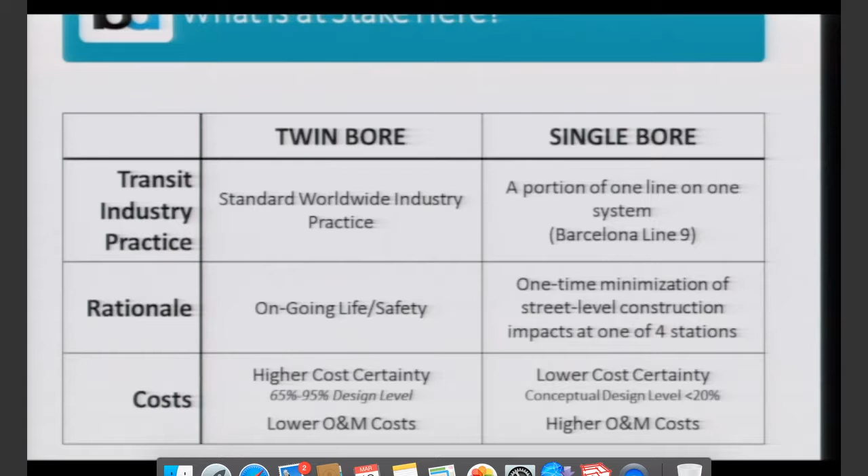We know that the ongoing operating and maintenance costs are higher for single bore. I think where I would leave it is that, particularly in light of the life safety concerns we have, cost shouldn't be, and I don't think is, a driver in terms of the ultimate decision made here. And with that, I'll turn it over to Bob Mitroff.

Good morning, directors. I'm going to walk you through the base option for the single bore design and a number of features of that option, including the tunnel diameter, the track alignment, the number of transitions, the platform configuration, the platform widths, and the station construction method. I'll focus on those 6 different attributes for each alternative as I walk through the base, the modified base, and all the other alternatives considered.

The single bore base alternative has some key features. One is you've got 4 transitions between side-by-side tracks and stacked tracks. And then you've got 2 long sections — one near the Alum Rock station, and one between the Downtown and Diridon stations — where you are in a stacked track alignment. You're dealing with a 45-foot wide single bore tunnel as well.

As far as the station design is concerned, again focusing on the safety attributes of the differences between the twin bore station and the single bore station — the first thing you notice in this drawing is that the twin bore station is much shallower.

The depth of the platform there is 55 feet. The depth of the single bore station platform is 85 feet below the surface—imagine you're at the Embarcadero station at the BART level and you go one level down from there. Having such a deep platform is going to have a significant impact on your ability to get people to the street as a point of safety within the 6 minutes that is the governing code amount.

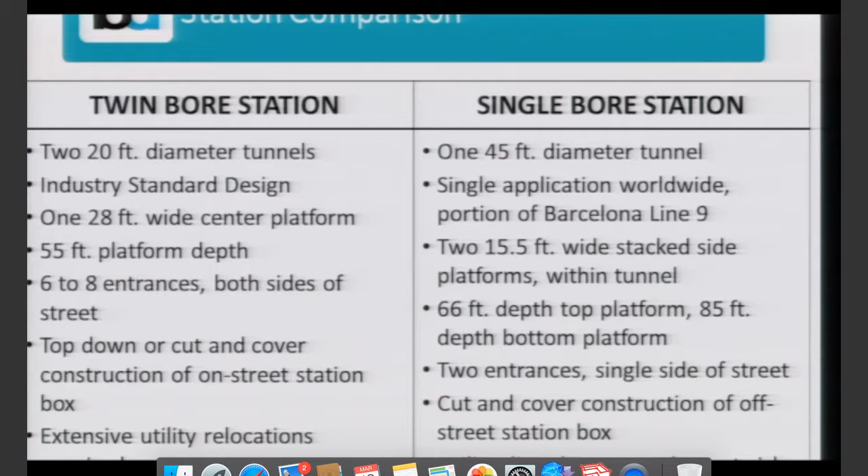This slide is just a summary of the attributes of each station. I pretty much went over all of these: the depth of the platform, the number of entrances. The narrowness of the stacked platforms in the single bore design is also an issue. We prefer a center platform because it allows you to use the off-peak half of the platform to handle the peak period crowd, whereas with stacked platforms like you have here, you're only limited to the 15 feet you have to handle the peak crowd.

So that poses an issue during evacuation, because people have to have at least 5 square feet of space around them to be able to move out of the platform area and into the concourse.

This is a cross-section of a conventional twin-bore tunnel design for BART. You'll note that you've got 2 tunnels about 20 feet wide, and then you've got a cross passage, and you'll have 33 of these within the 4-mile subway, which has a number of desirable features. It is level with the train, and it has doors on either side to prevent smoke, serving as a buffer from the smoke of the incident train to the rescue train.

Okay. Anything else on that, Tom?

The advantage of this configuration when you have an emergency incident is that the patrons from the incident train can pass through the passageway, allowing you to corral them there so they don't end up in the trackway for the rescue train. Without this configuration, whether stacked requiring people to go up or down, or two tracks connected without a passageway, patrons go from the incident track to the rescue track, creating a much higher risk of patrons ending up on the trackway as crowding around the doorway increases. So the advantage here is crowd control for an emergency evacuation.

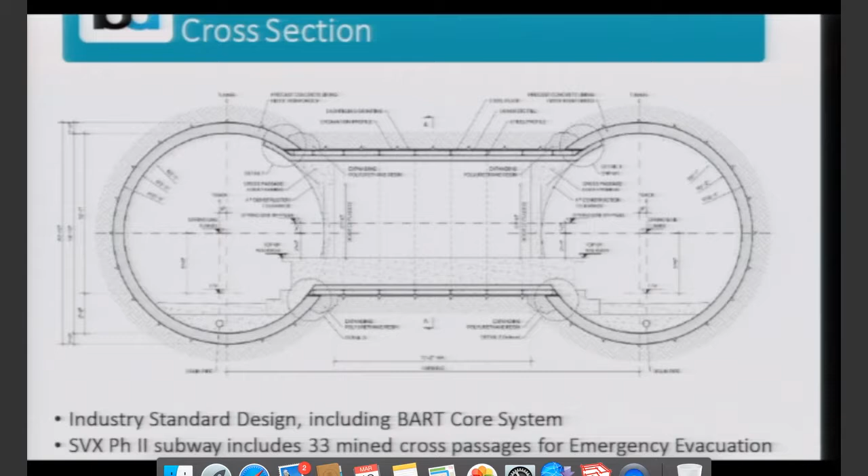BFS, what does it mean? BART Facility Standards.

Thank you. This is a very important slide, one of the things the peer review panel focused on more than anything during our presentation. It shows the transition within the single-bore tunnel between side-by-side trackway and stacked trackway. On the left, the trains within the tunnel are side-by-side, separated by a doorway. Compared to the mined cross passages design we saw before, this has less of a buffer zone between the incident train and the rescue train, which concerns us. But what concerns us most is that as the tracks go from side-by-side to stacked, you lose the stairway between the tracks for nearly 1,000 feet, from the 3rd tunnel cross-section to the 2nd on the right.

That's 3.25 football fields where people, depending on where the incident is on the train, have to use the 30-inch walkway to get to the stairway that ultimately leads them to the rescue train and to the point of safety. Let's stop for a minute.

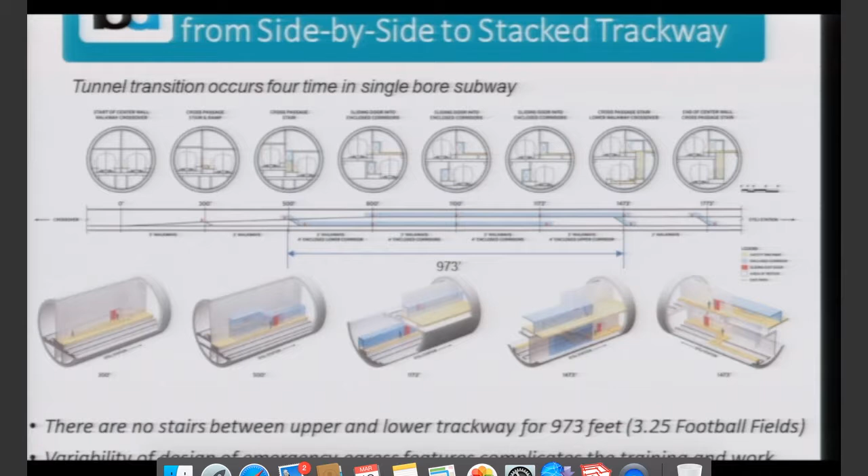That makes getting proper ventilation in the large sections extremely difficult. Just to tie it back to what Paul was saying before, the fire in DC—I don't know about the one at BART—but the diagnosis from the DC fire was the fans. One problem was the ventilation system was there, but they put the fans in the wrong direction. So the more complex the tunnel configuration, and the fact that it's changing, raises the concern that the direction of the fans and the operation of clearing out wherever people are becomes far more complex than anyone would want to have on their hands.

These issues were presented to the peer review committee that met in mid-November of last year. The peer review panel members were composed of senior executives in operations and construction from LA Metro, SFMTA, New York City Transit, WMATA, New York MTA, and MARTA.

One of the main issues they focused on is what are the risks and challenges associated with the single bore option, and can it be operated and maintained as safely as an extension of the BART system?

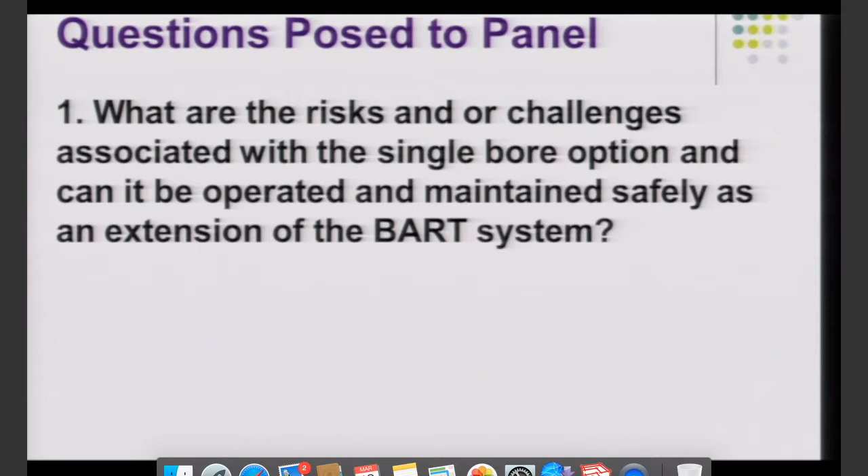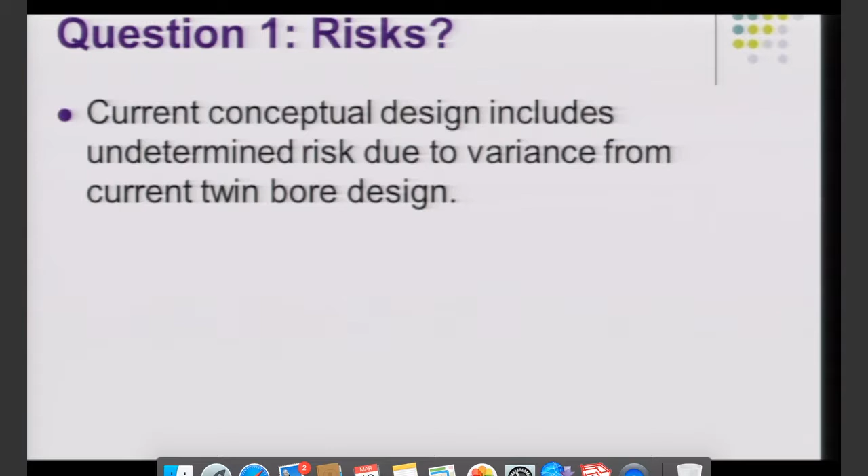They determined that the base design presented an undetermined risk due to its variance from the current BART twin bore design. Specifically, they focused on the transition areas as presenting the most risk during train evacuations, and they highlighted a number of things, including that you have to rely on stairs for evacuation in the stacked alignment.

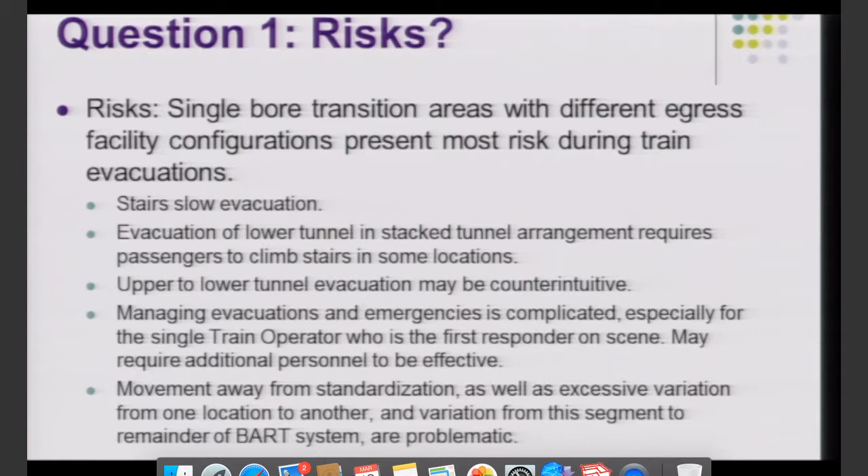Sometimes you're actually going from an upper level to a lower level during an emergency evacuation, which is a counterintuitive move. You're putting a huge amount of pressure on the single first responder, which is the train operator. And you're moving away from standardization, which raises the ventilation issues Barney was speaking about, given how different it is from the rest of the BART system.

Training can help, but as Paul mentioned before, in a moment of emergency, in the fog of war, the equipment and infrastructure has to be as intuitive and consistent with the rest of the BART system as possible.

There are other issues, less related to safety, but maintaining all of those escalators in service with those very deep stations is going to be an expense as well as a challenge, as we all know.

Single bore has been used in roadways, but never in a heavy rail transit design in the United States. And while VTA would be the owner of the facilities, in the event of an emergency, BART would be the de facto owner.

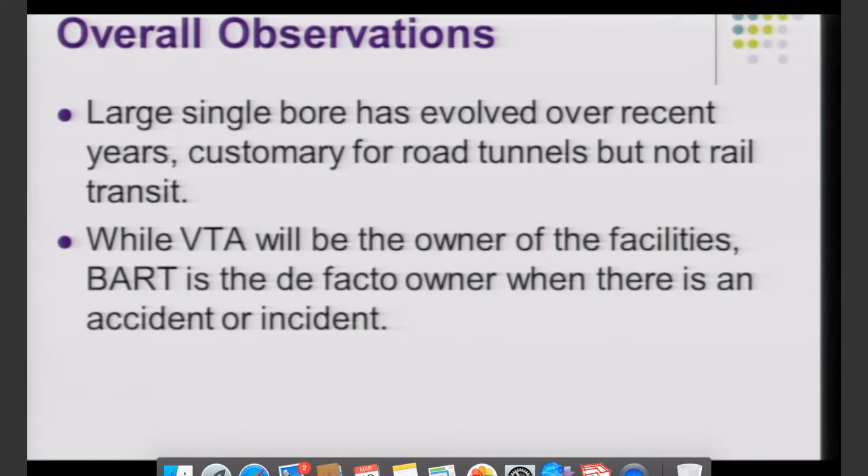They recommend that the project go forward with a unified front, and that the safety and operational issues BART has raised be recognized and reconciled by both parties. If they had to choose one alternative, they recommended twin bore as the alternative going forward at that time. Single bore could be operated in a manner consistent with BART's safety objectives, but there would have to be a lot of work done on consistency, training, and fire life safety. But even with all that, the risks outweigh the benefits with this method of construction.

They did instruct the panel to work on design options for single bore that could meet BART's design safety concerns, and we'll discuss those now.

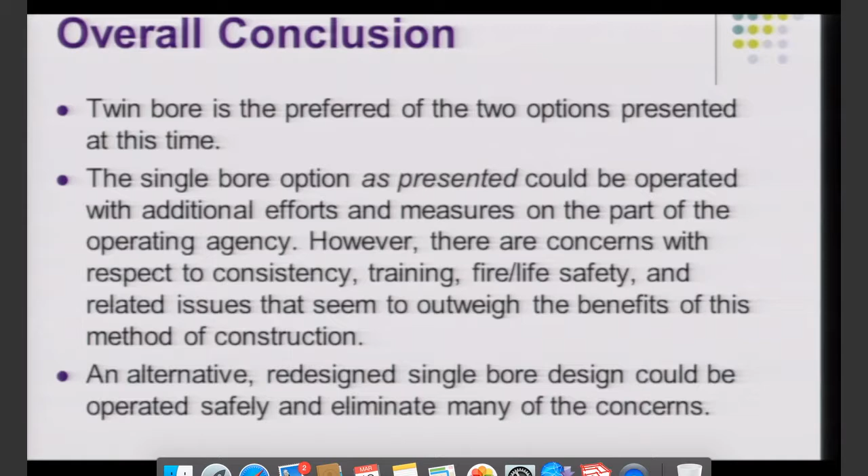In order to have a productive discussion between the two agencies on design options for single bore, VTA asked BART what our main objectives are in the design of such systems. Those are laid out here.

We want side-by-side, not stacked trackways, in the tunnels and at all stations. We prefer center platforms with sufficient width to handle future ridership. Another issue with the side stacked platforms at their downtown station is they're 15 feet wide, built inside a tunnel, and that's it for 100 years.

The ventilation system should be consistent with our existing ventilation systems, especially during emergency. The design for fire growth should be consistent with NFPA (National Fire Protection Association) 130 provisions, the California Building Code, and our own facility standards, which call for an instantaneous fire growth scenario, which you have to look at in the event of an arson fire

or a train on fire coming into a station. BART is willing to consider an engineered point of safety underground, provided that it meets all the provisions of these same three codes: the NFPA, the CBC, and the BART facility standards. We are very concerned that people who have mobility issues can be safely evacuated from an incident train to a point of safety. Therefore, we wanted both sides to develop an emergency response plan with input from first responders, fire departments, our system safety department, as well as the ADA community in the larger BART district, as well as Santa Clara County.

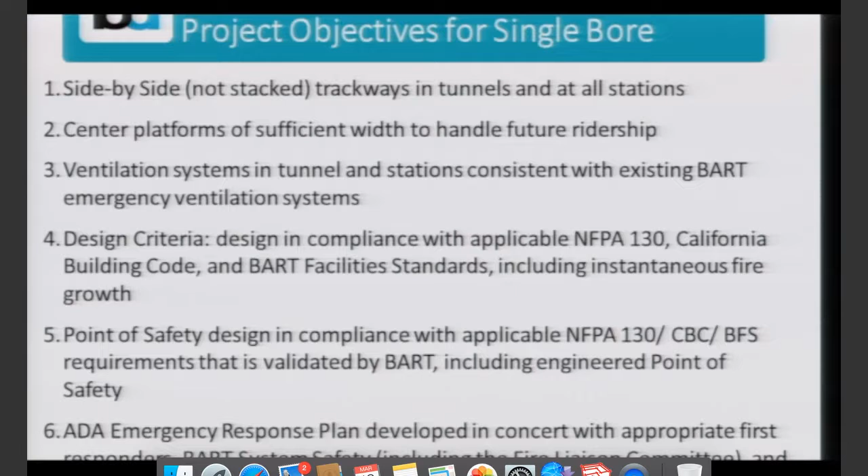Just to frame the issues we're dealing with in terms of passenger volumes at the stations we're most concerned about—again, we're most concerned about the downtown San Jose station. That is projected, in 10 years after its opening date, approximately year 2035, to have 24,000 daily entries and exits, which puts it in line with some of our medium-sized subway stations, such as downtown Oakland, downtown Berkeley, 16th and 24th in Mission. The other stations they would be building within the subway are more in the range of Ashby and North Berkeley ridership levels. Again, all the stations I've mentioned here have center platforms within the subway.

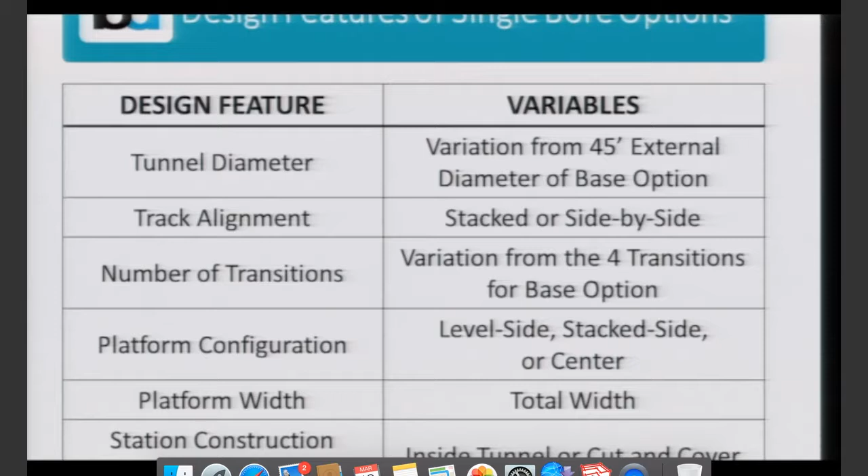So the key features we were looking at, as I raised earlier, when we talk through the design options, these are the things that are going to be varying: the tunnel diameter and its variation from the 45-foot external diameter of the VTA single-bore base option; the track alignment, whether it's side-by-side or stacked; the number of transitions, with 4 being the number in the base option; the platform configuration, whether you have level-side platforms, stack-side platforms, or center platforms; the absolute width of the platform; and the station construction method, whether it's inside-the-tunnel construction, as the VTA single-bore base option is, or cut-and-cover construction.

So the first option VTA presented to us is basically a minor variation on the base alternative, where they would construct—you see them in the red squares on the diagram—emergency exit stairs from the tunnel in the transition sections. This would allow you to reduce the evacuation distance in the tunnel from 1,000 feet, 3 football fields, to 500 feet, 1.5 football fields. Mind you, you're still 80 feet underground. You have to walk up 8.5 flights of stairs to get to the street. So this is an improvement, but it's not the game changer we needed to be able to recommend this option to you.

It has one additional feature, addressing the fact that a station with only 2 entrances is likely to have a conflict in emergency exiting traffic between first responders and patrons. So they're proposing to install a separate first-responder-only stairway within the station to get first responders from the concourse to the platform. But again, that's 8 flights of stairs to get to the bottom of the platform. So this is the option VTA is recommending at this time. BART staff cannot recommend this option to you. There are other options we will go through that we think have merit.

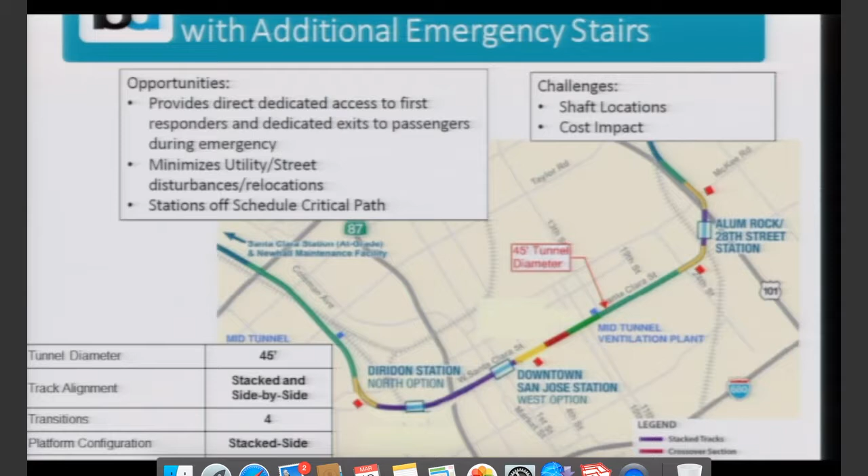Yes. It does not address the fundamental issue of the complexity for ventilation and evacuation within the transition areas, especially the ventilation issue.

Okay, that's helpful, I'll ask more questions. And I'm sure a number of folks on the board are going to have questions, so if you can give us a little bit of an idea—the duration of this presentation, and the kind of questions we're going to need to field today versus what action we need to take, in terms of the timeline, because you all have been committed as staff to coming to this board at least once a month, twice a month, with these updates. So I just want to give us some frame. Yeah, I think Bob's got, I don't know, maybe 10 or 12 more slides here.

And then we go into a little bit on Plan B. Grace, the general manager, has repeatedly said to this board and to me, Plan B is the twin bore. So there's the construction staging that we could walk the board through on twin bore that's up here. And Director Simon, to your question, one of Bob's slides coming up is the schedule on when the BART board is going to need to take an action and what that action may or may not be.

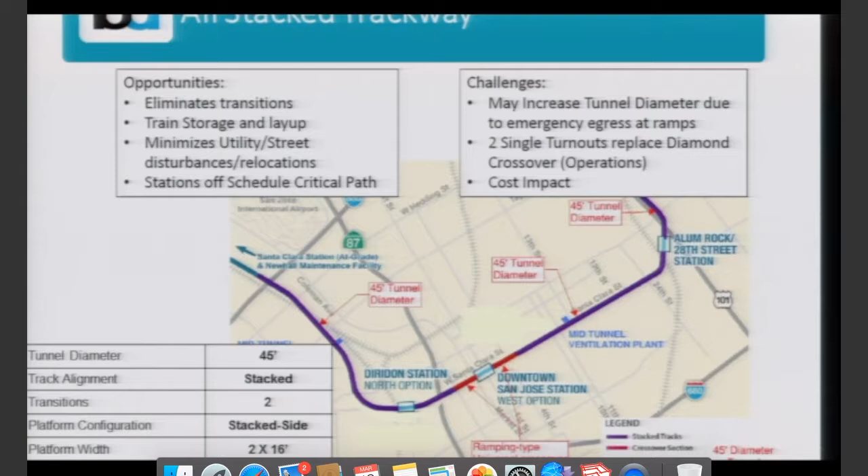So in an effort to reduce the number of transitions, VTA came up with a couple of alternatives. One is that you run an all-stacked alignment from Alum Rock all the way through to when you come out of the portal near Santa Clara. So you still have two transitions, you still have a 45-foot wide tunnel. They recognize that we have evacuation issues with an all-stacked alignment, so they are not recommending this alternative, and we agreed with that decision.

The next alternative is you move the transitions right around the downtown station. So instead of transitioning by Alum Rock and Santa Clara, you're transitioning just as you enter and exit the downtown station area. This is a more significant improvement in the design because you're going from 4 transition areas to 2. You're still dealing with stacked alignment in and around the downtown station, and you're still dealing with the narrow side platforms at that station.

I have to mention one major attribute: in order to maintain side-by-side trackway at the Diridon and Alum Rock stations, you're going to have to do cut-and-cover construction at those stations. And as we've mentioned before, Alum Rock is an industrial area for the station site, and the Diridon station is a parking lot, so you're not dealing with the business impacts of constructing cut-and-cover at those locations.

Just a point of clarification. On this slide, I read this as there's only one stacked station downtown. Correct. I'm confused with the mention of Alum Rock. Alum Rock would be a level side platform configuration, similar to some of our cut-and-cover stations.

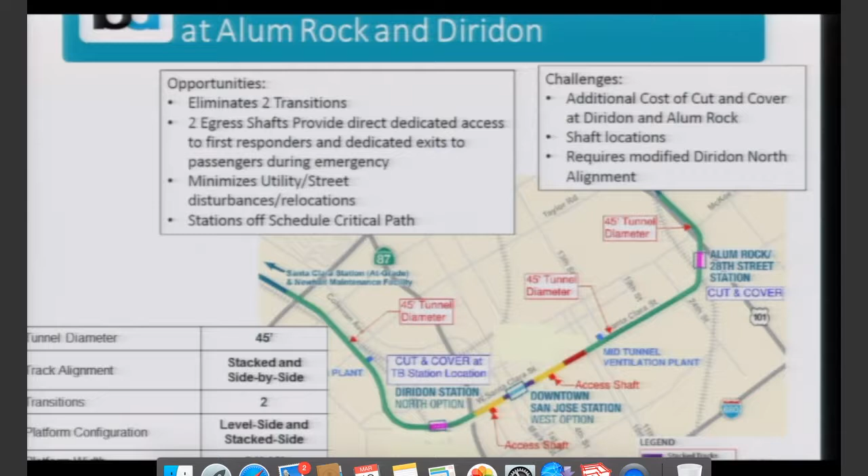An alternative that I think is more acceptable to BART, probably the most acceptable of all the alternatives they looked at, is you run in side-by-side configuration the entire subway, and you do cut-and-cover construction at all 3 subway stations. What it lacks is center platforms at those stations. It would have level side platforms to deal with the platform crowding issues that side platforms give you. You could potentially lengthen the platform beyond the 700 feet, so you'd have more room for movement for people evacuating. Another positive attribute of this option is that they're looking at a 37-foot tunnel diameter instead of a 45-foot diameter, which means the stations would not have to be as deep underground.

Right, and then the tunnel would just hold the trackway. And then when you get to the station, the track would be in the middle, the platforms would be outside, and you would do cut-and-cover construction to build the platforms at the stations.

Wait, can you comment on that one?

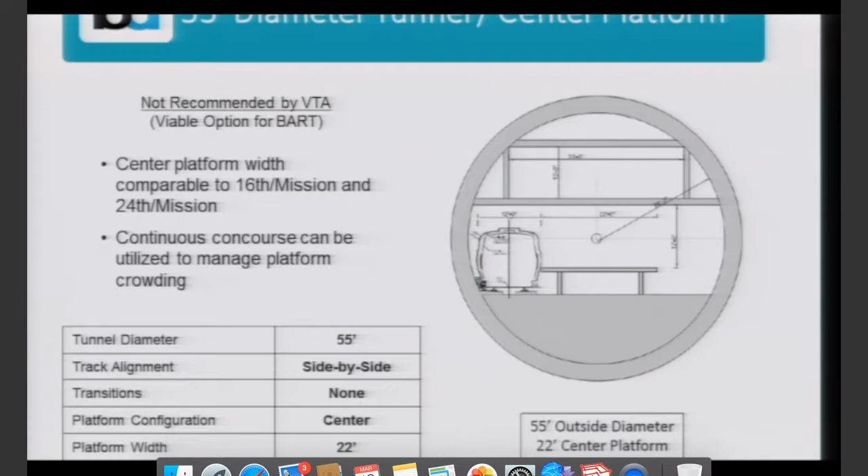I would just add that we really struggled with this one before we got to the point of saying, okay, let's put this forward as something we could live with. The reason we struggled is the width of the platform. You probably know the situation at Embarcadero, which is, I believe, a 26-foot platform, so this is narrower than Embarcadero. Frankly, the reason we can live with it is because the working assumption here is that there will be platform edge doors, which have the effect of increasing the effective capacity of a given width.

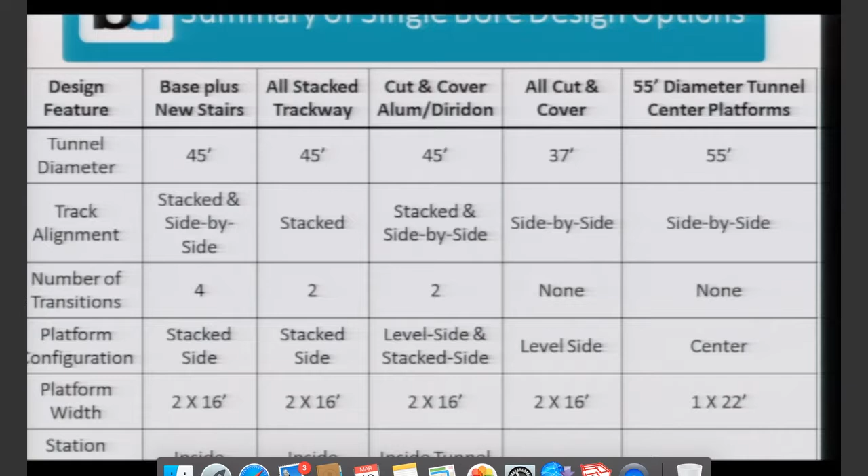So this is a summary of all the alternatives, just for your record keeping. Again, there are two alternatives we think we could go forward with: the all cut and cover design with the 37-foot tunnel and level side platforms, and the 55-foot tunnel center platform option.

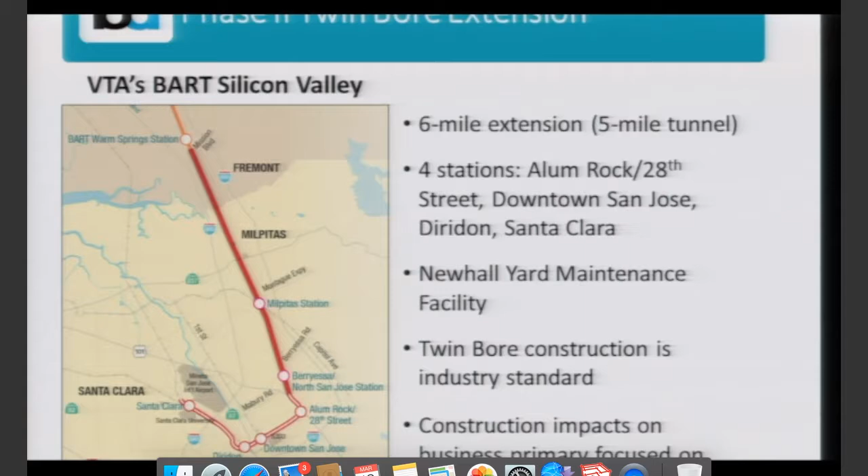Just to give you a little more information on the twin bore alignment, this map illustrates the area we're talking about for street impacts. Again, it's just the 4 or 5 block area of Santa Clara Street in downtown San Jose. The phases of construction for the twin bore are laid out here.

The first thing you have to do is relocate all the utilities. That's a highly complicated effort. It would take between 16 and 24 months.

Then you would install walls on the side of the ultimate construction trench, which you could deck over, so you could finish building the station box while you've reopened the street. You've got this period under station structure construction, 18 to 30 months, where block by block Santa Clara Street is reopened. At the end of the job, you remove the temporary decking, install the permanent station box cover, and restore the street.

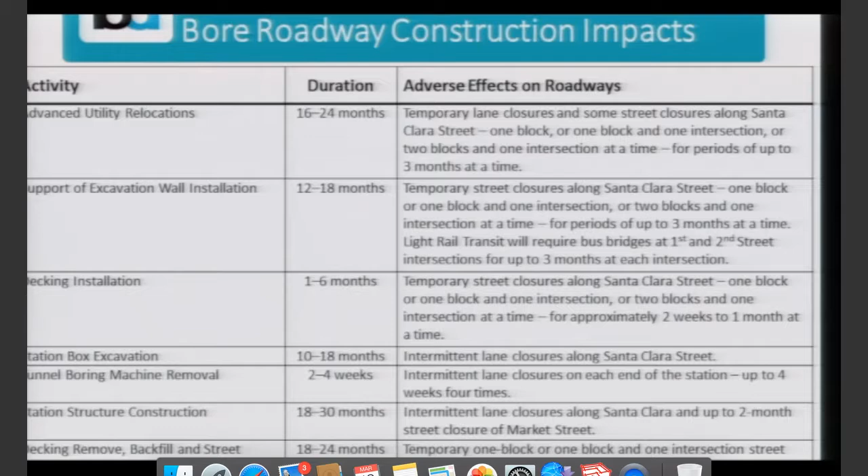They estimate that we're looking at 5 years of street impacts within Santa Clara, and they actually did a good amount of work on a staging strategy for this construction that was approved by Mayor Chuck Reed of San Jose before this phase of the project was put on the shelf.

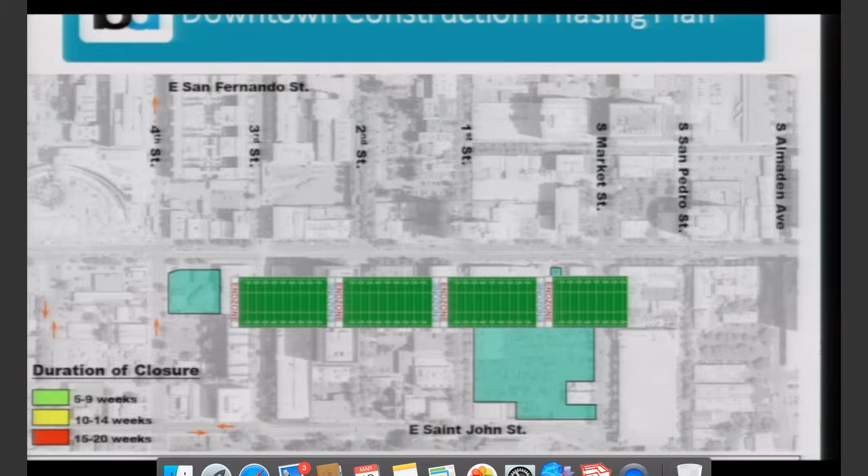So again, you're looking at this area from Market Street, and unfortunately this is confusing because you're facing south. Market Street is the western limit of the project, and the area one block from City Hall between 3rd and 4th Street is the eastern limit. What you would do is go block by block, opening up each block, doing your utility relocation work, then decking over it, and moving on. This timeline shows over the 6-year period how this would sequence.

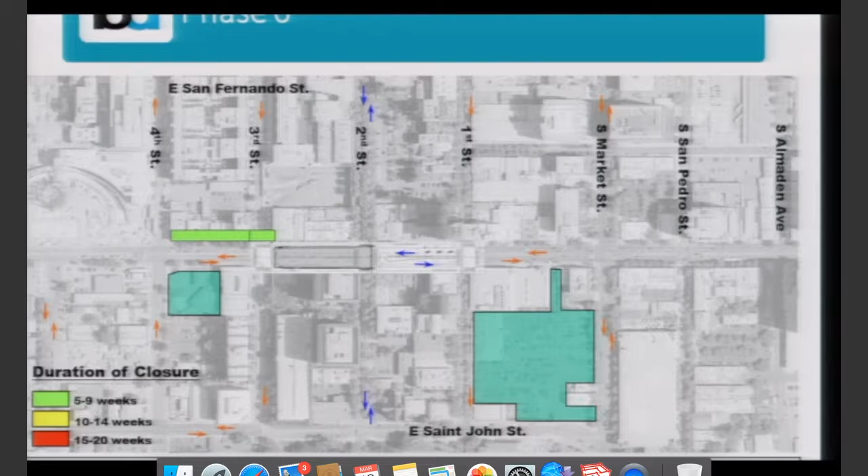It shows you the number of weeks associated with each of these phases in the upper color-coded diagram. So what we had at the beginning of this month was a...

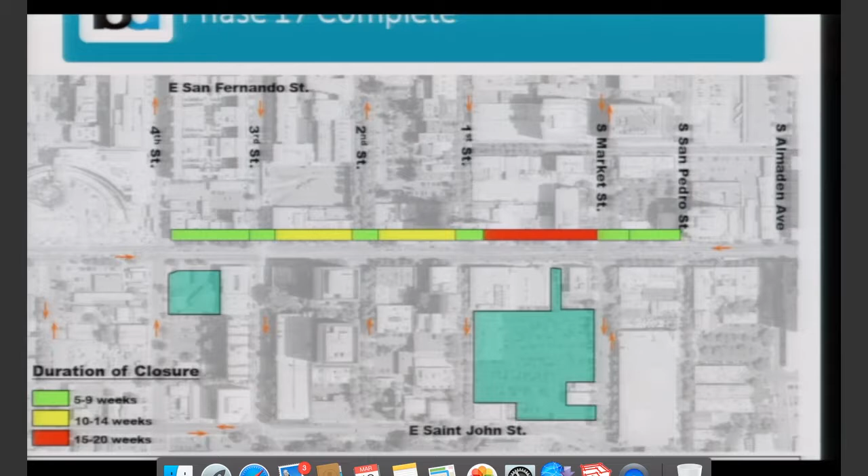constructability workshop with tunneling experts from all over the country looking at ways we could do further mitigation of the time as well as the level of impacts during construction. They came up with a number of interesting ideas, one of which everybody seemed to buy into: moving the entire alignment closer to City Hall, where you have vacant land near a Chevron station that you could stage the construction. By doing so you would not have to relocate all the utilities underneath Santa Clara Street, which is a major corridor through downtown San Jose.

So anything more on that you would like to add?

No, last time I was up here, Bob, you told me to kind of sit down, so I'll just sit down here and be quiet.

Good job. Okay, so just on the look-ahead schedule, here we are in March. We've got the O&M agreement negotiations, and we talked about that last month. Those have slipped to board presentations in May and June because we want to have an adopted Phase 2 project before we take the O&M agreement to the board. Otherwise, all the references in the O&M agreement to the Phase 2 project would have to be removed.

Right now we're coordinating with VTA management on a daily, hourly basis. VTA is going to be transmitting a memo to its board in a few weeks recommending a tunneling methodology as well as a station location. We've got a potential joint committee meeting of the BART and VTA boards on March 29th, all leading up to the VTA board certifying their environmental document and approving the project on Thursday, April 5th, with a follow-up action by the BART board on April 26th. That would be the second regular board meeting of that month.

And with that, any questions?

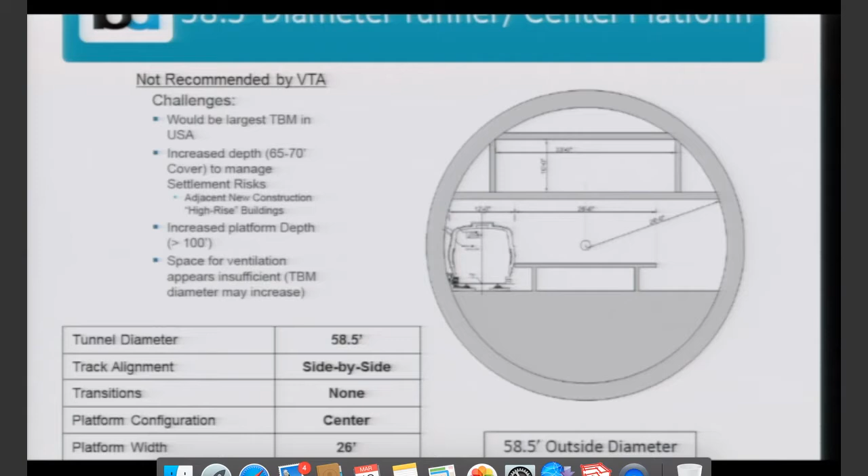The 58.5-foot one I believe is the risk of settlement in downtown. And what about the 37-foot one? Well, the 37-foot one was dismissed due to the cut and cover street impacts downtown.

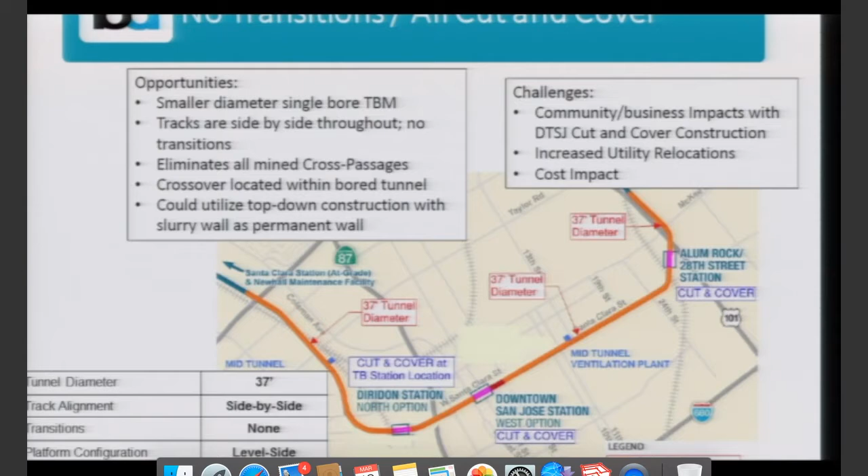I mean, do you have a summary of other questions? Because I want to make sure I have one more speaker after you. So actually, I have two more now. So what are we going to get? How can we get a presentation on mitigation before we have to vote on this? Because I know there were a few slides at the back here on mitigation, but we spent a significant amount of time talking about all the problems with the single bores, and I know there's been a lot of work done on mitigation.

Director, I listened very closely to Director Dufty, and I wrote it on my notes here. So on the 22nd, which I think is our next meeting, we'll have a discussion in front of the board with mitigation.

Thank you. And I think the timelines of this stuff are really important, because I'm a bit confused. I tried to add up the duration in slide 28 that you had, and it came to sort of 10 and a half years, and we're talking about 3 months here, and that just didn't add up. It would be really helpful to go in depth on the timelines to really understand exactly what's going to be disrupted when, and the animation was super helpful.

I'm really concerned that we are where we are on this, and I know it's not entirely... I know there are two people here, and I've got a wife and she's got a husband, and I know that when we have a fight, it's always her fault, and for her, it's always my fault.

But we're like a month away from what is sort of the largest transportation project that the Bay Area has seen in the past decade, and I don't have a lot of confidence that we're getting to the finish line on this.